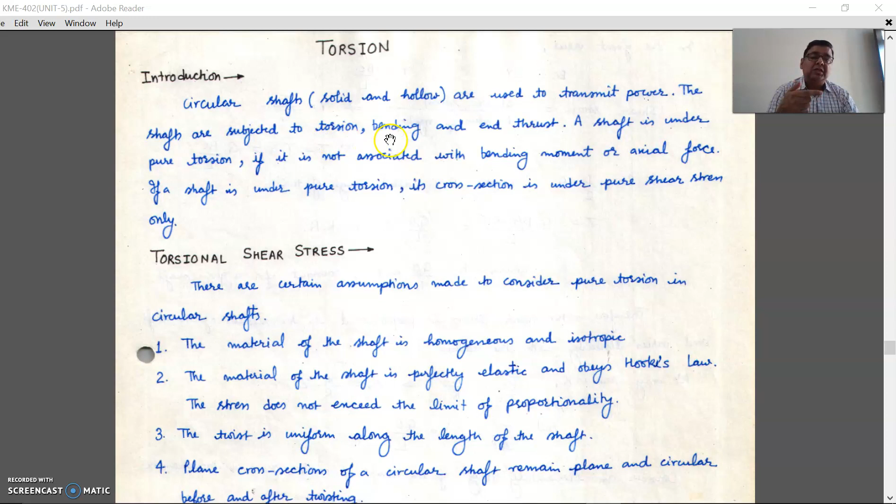Now this main shaft is under end thrust, because this shaft was fixed between some bearings. End thrust means it was fixed under, let's say, a tensile or compressive force.

And there are different types of gears associated with it, and these gears have a certain weight. Because of the weight of the gears, the complete shaft was under bending moment also. And because this shaft is rotating, it was under torque also, because whenever we rotate something, we have to apply torque to it, so twisting takes place, right?

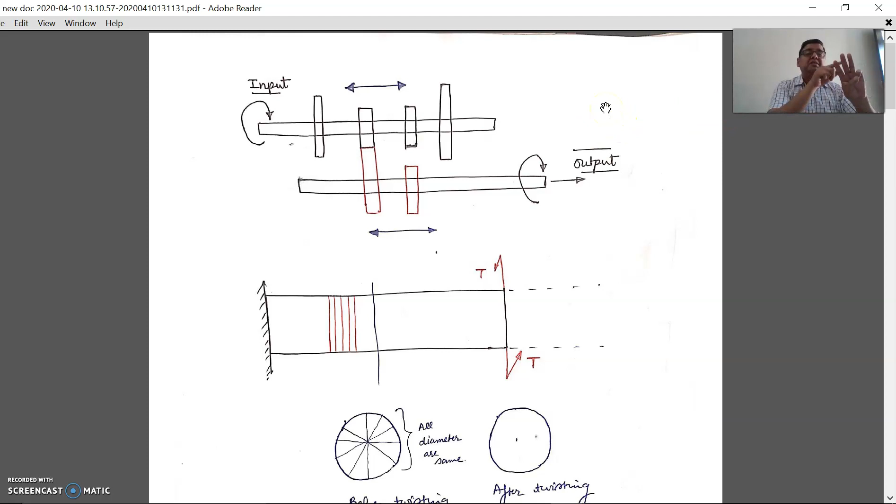So in this case there are three different aspects this shaft is undergoing. One is torsion because of transmission, one is end thrust because the shaft is fixed between two points, and another is bending moment because of these four different gears and the weight of the shaft, right?

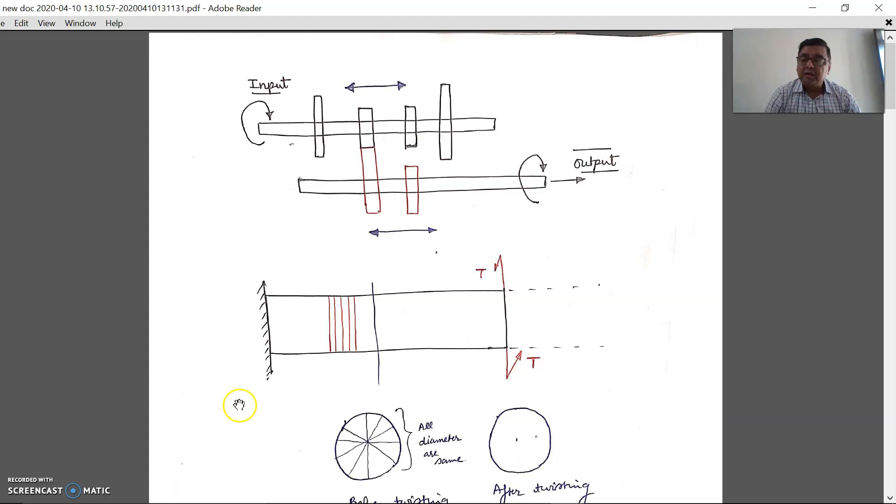But in this chapter we'll consider only pure torsion, that is, the shaft is under only torsion. Now this shaft is fixed at one end, and on the other end, shown by the red drawing, I am applying torque to it. So in this case the entire shaft is twisted: fixed at one end, with torque applied at the other.

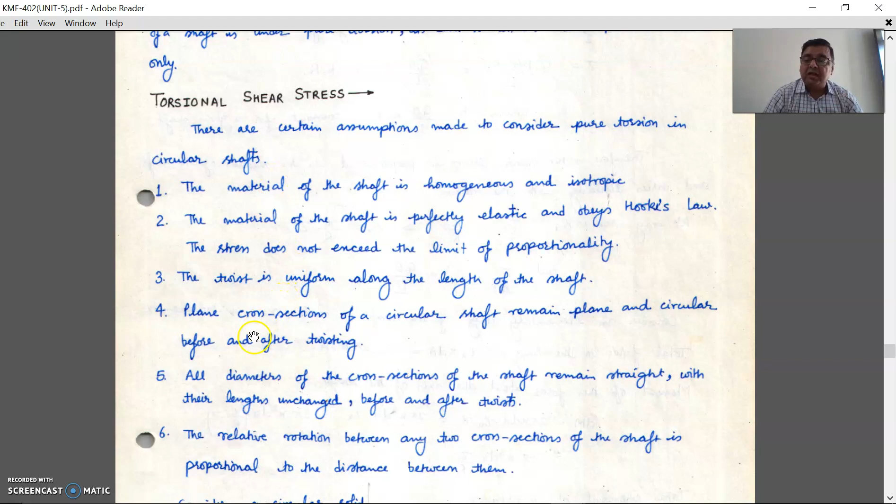There are certain assumptions we have to follow when doing the analysis for pure torsion. These are 5-6 assumptions, and they are easy to understand, but one is very important: a plane cross section of a circular shaft remains plane and circular before and after twisting, right?

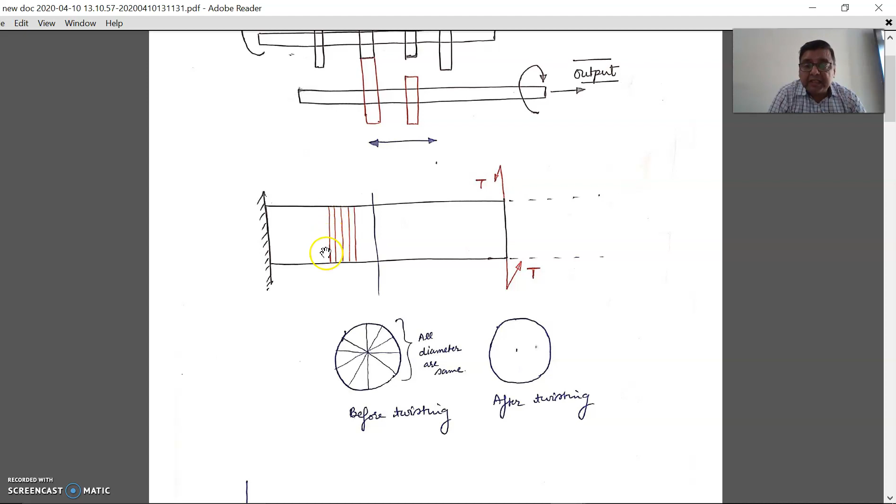Let us explain how this actually works. If this is the shaft under pure torsion, these are the different planes: first, second, third, fourth, fifth plane. If I draw the side view of each plane, this type of side view will be there.

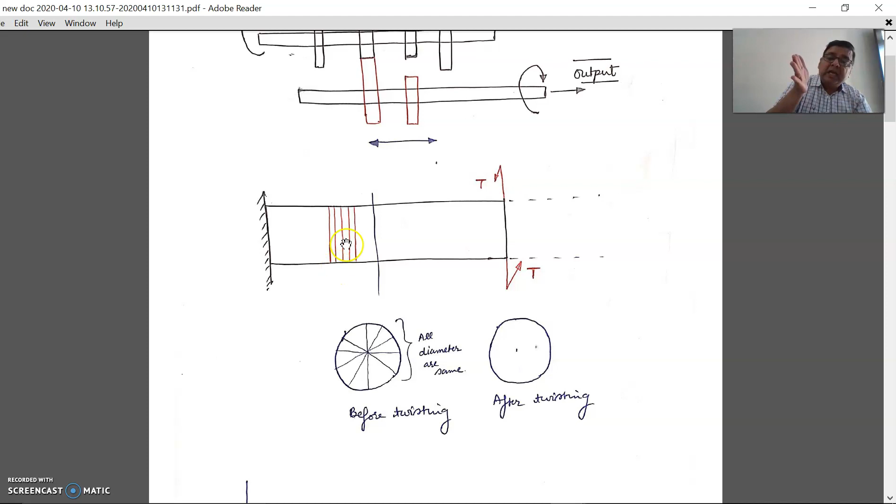Now this plane will remain plane, meaning it will remain a circle only. It will not change into an ellipse. That's what this assumption says: a plane cross section of a circular shaft remains plane and circular before and after twisting. The same is stated as: all diameters of the cross section of the shaft remain straight with their length unchanged before and after twist.

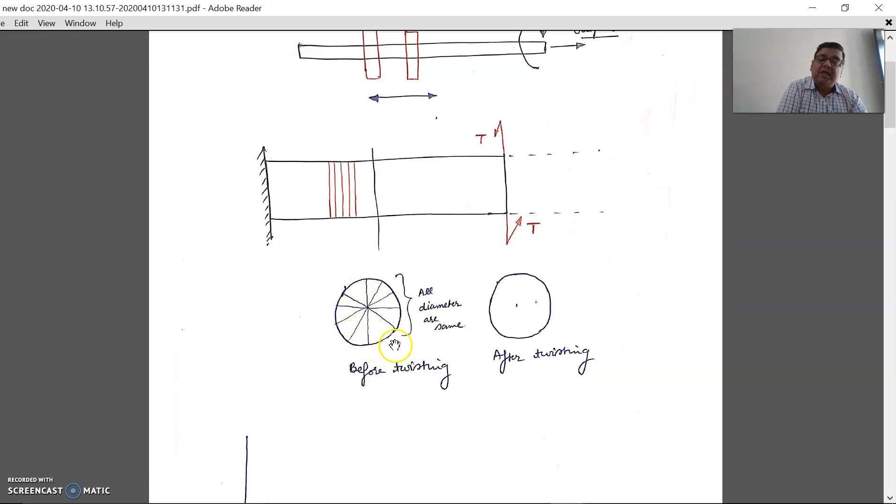The same expression is said in two different ways. Likewise, the fifth point explains that all diameters remain the same. That means the circle will remain a circle before and after twisting. Okay, so these are the different assumptions.

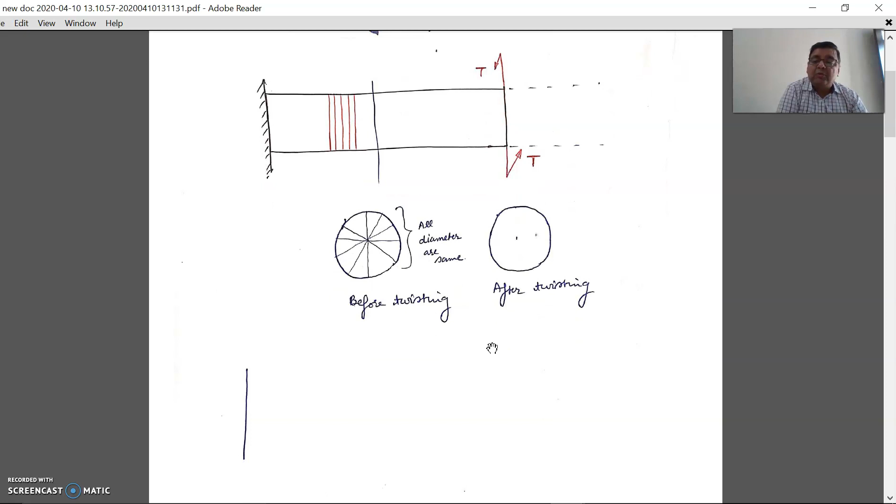Now we have to derive the torsion equation, right? And that torsion equation is T/J = τ/R = Gθ/L, and we'll use this torsion equation extensively. Let us see the case for it.

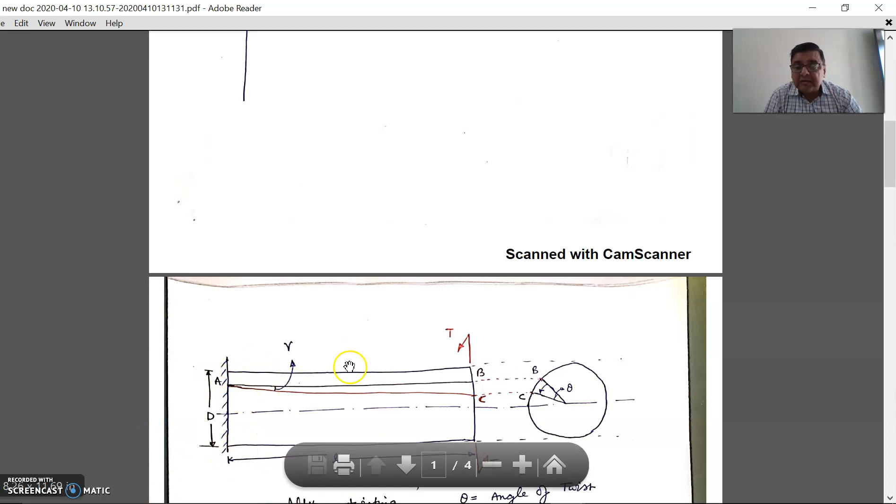This is the shaft, and on it we draw one line AB; this is the front view of the shaft, and point B is marked on the side view. If this shaft is under pure torsion, with T on this side and T on that side, then point B will shift to point C, while the other end remains the same. In the side view it moves as this arrow indicates, from B to C.

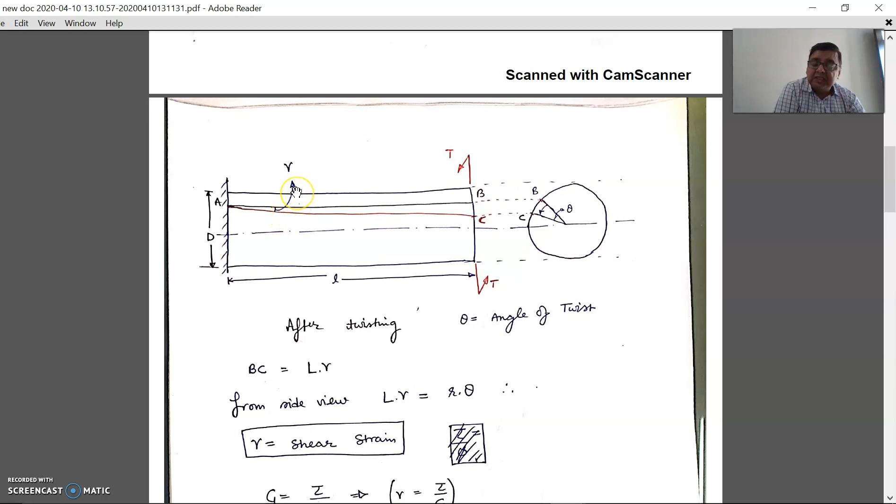In the side view, this is the angle theta, which is called the angle of twist, whereas this is called the shear strain, and this shear strain is gamma. Now if we try to calculate the value of BC from this diagram and as well